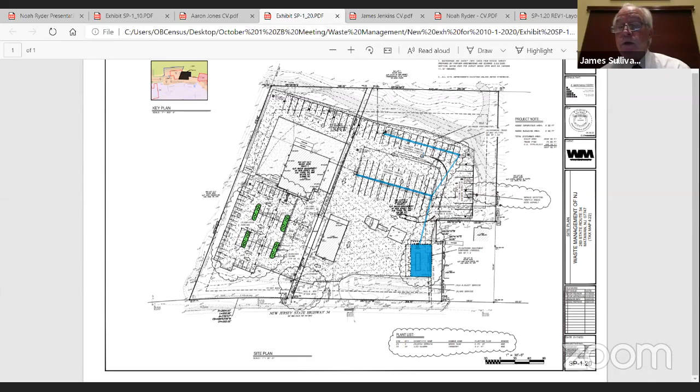Okay. Mr. Sachs, you have anything? No, I don't, Mr. Chairman. Mr. Garrity, Fire Marshal Garrity, I'm sorry. Yes, I do. Mr. Mitchell, one question.

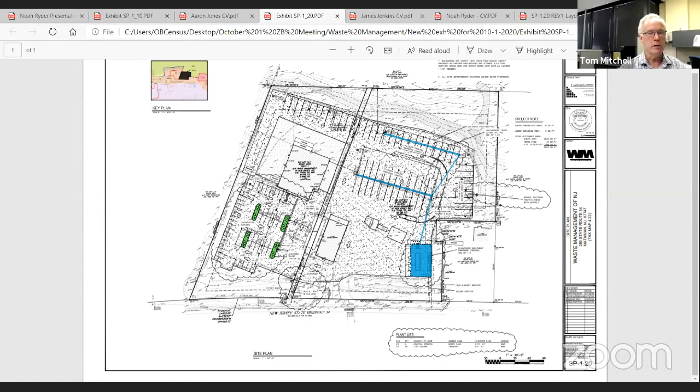The fuel package on the Diesel Island now, what is the intention? Will that stay until your new process is in place? Will that be removed as you are going to be paving the area? It would be a smart time to remove the underground tank from there. Yeah, there is an intent to eventually phase that out and remove it completely. The timing for that is a little bit up in the air because of everything that we've all been experiencing this past year. Financially, budget-wise, it's difficult to project when that will actually be removed, but that is the intent.

And also, Tom, I think it's the case that the proposal to get the new CNG vehicles, it's not going to be all at once. It would be a phased transition, and that's another reason we would keep that on site, or at least that's my recollection of our testimony from the previous meeting - we intend to eventually phase it out, but that would be a subsequent demolition decommission permit. Okay, thank you very much.

Board members, I'll go Ms. Chevalier. No questions. Okay, Ms. Kilduff. No questions. Mr. Dewhurst, a question for Mr. Garrity?

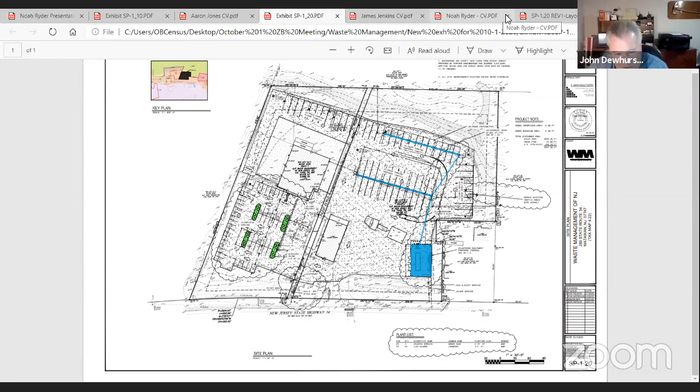Okay, Tom, the fire hydrant moved on the inside. Is that the only hydrant that's there now? That is the only hydrant that is on site. There's a hydrant directly on Route 34 on the other side of the gate. And the reason that was put in there is to get the engines and whatever equipment onto the property and off Route 34.

Okay, thank you, Tom. Mr. Connor? No question. Okay, back to you, Mr. Sardo. I believe I caught everyone there. Thank you. The next witness I'd like to call is Noah Ryder.

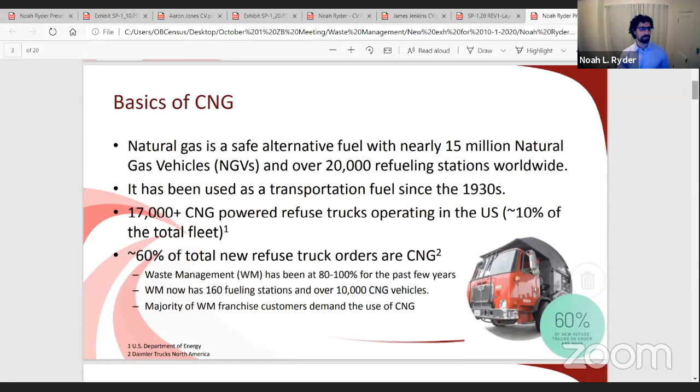So when we talk about CNG and its prevalence, one of the important aspects to understand is the safety that is associated with it, and some of the things that make it equivalent or even greater safety than is often associated with diesel or gasoline powered vehicles. So CNG is treated with an odorizer.

Usually it's ethyl mercaptan, can be something else occasionally, but that's the typical one. It's detectable at a very low limit, usually about 10 to 20% of the lower flammability limit, which means you're detecting it about 5 times earlier, or at 1/5 the concentration that would be required for ignition. So you're smelling it well before it becomes a hazard.

In addition, it's much lighter than air, so it rises rapidly and dissipates quickly as well. The hazard is actually moving away from typically occupied areas and where vehicles and personnel might be, which is a good thing in reducing the risk.

In addition to being able to smell it early and its buoyancy properties, it has a pretty narrow range of flammability. This means it has to be in the proper mixture in air in order for it to actually be flammable. If it's less than a 5% concentration or greater than 15%, it won't be able to ignite.

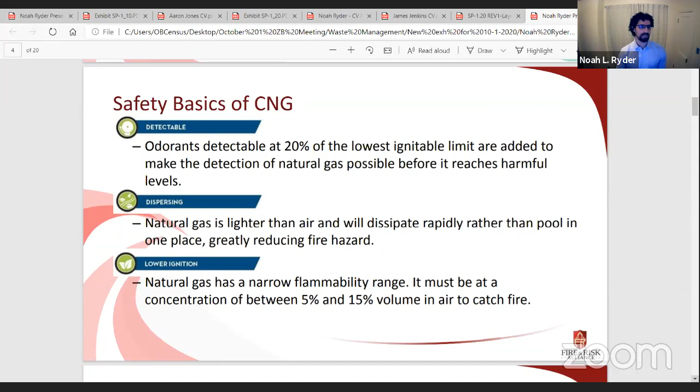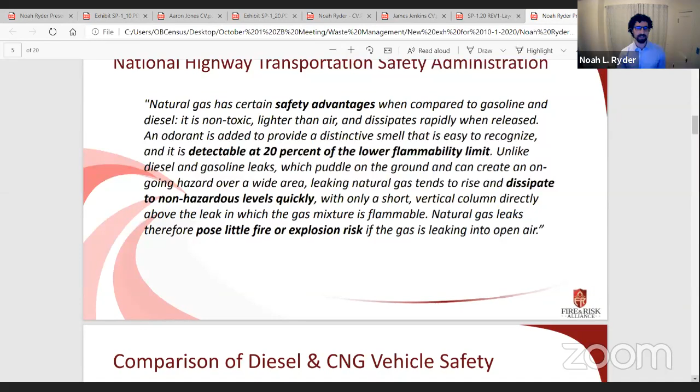So some of these properties have actually been summarized by the National Highway Transportation Safety Administration in a report they've published on natural gas vehicle safety in general. I've kind of highlighted a number of things here in bold. What they say is that natural gas actually has a number of safety advantages over gasoline and diesel vehicles.

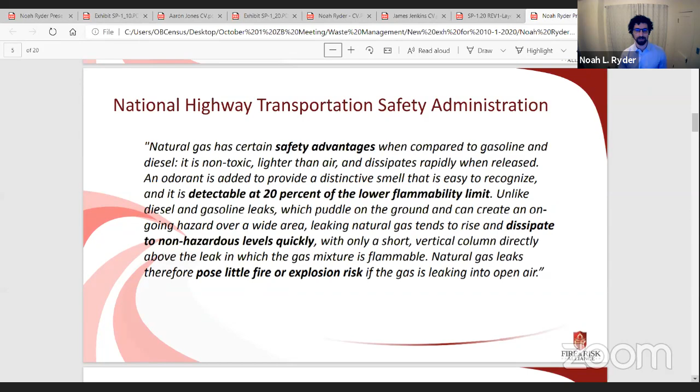It's detectable at 20%, as mentioned before. It's lighter than air, so it dissipates to non-hazardous levels quickly. In conclusion, when released into the open air, it poses little fire and explosion risk. This is based on their own research and statistical analysis, as well as the understanding of the physics of CNG. This is kind of the official position of the Highway Transportation Safety Administration.

Thank you. So one quick thing for a couple slides to compare diesel and CNG vehicle safety, because that's kind of what the transition is moving towards.

In addition, I believe Marty spoke a little bit earlier about the fact that they have never had a cylinder failure. This has also been shown to be a relatively low event broadly across the board, not just with Waste Management, but with all CNG operators - the rupture rate for cylinders is nominally 1 per 56,000 cylinder years.

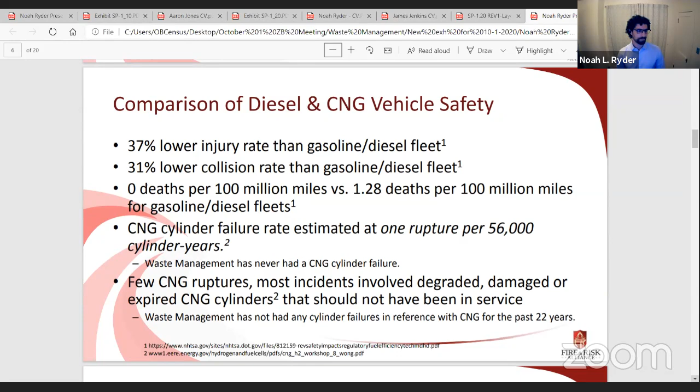In addition to that, oftentimes you may hear or see about fires in refuse vehicles. One thing that is important to note is that fires that occur in the hauling area really occur at the same rate regardless of the type of fuel that's operating or driving the vehicle. So whether it's a diesel or a CNG truck, if a fire catches in the hauling area, it is kind of irrespective of what's going on underneath the hood, so to speak.

Similarly, if there are fires that originate within the cab itself, in the driver area or so forth, most of those components are identical, and so a fire there is nominally the same statistically speaking, regardless of fuel type. So a lot of the events you may see are driven not as a function of fuel, but from other incidents or things that have led to the fire itself.

Just to interject - your understanding of CNG vehicles is that when there is that kind of fire in the hauling area, as you put it, the safety features in the CNG vehicles include heat detection on those cylinders that, in the event it heats up to the point of detecting a fire, vents the CNG right out directly up into the atmosphere to disperse the fuel and get rid of that flammable element.

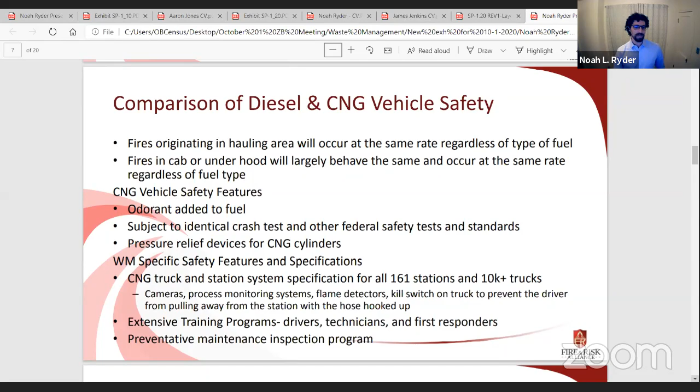I'll take a minute here to go over the next two slides, addressing regulations and codes and standards. I'm not going to spend a lot of time other than to say that as it relates to CNG vehicles and operation, there are quite a number of national and international codes that address all components.

Going from the cylinder itself and how it's pressure rated and constructed, to valves, breakaway devices, the flexible hoses themselves - all of these are required to meet standards developed by well-recognized national or international agencies, such as ANSI or NFPA or others. All of these standards combined are what allow these facilities and vehicles to be produced and operated in a consistent and safe manner.

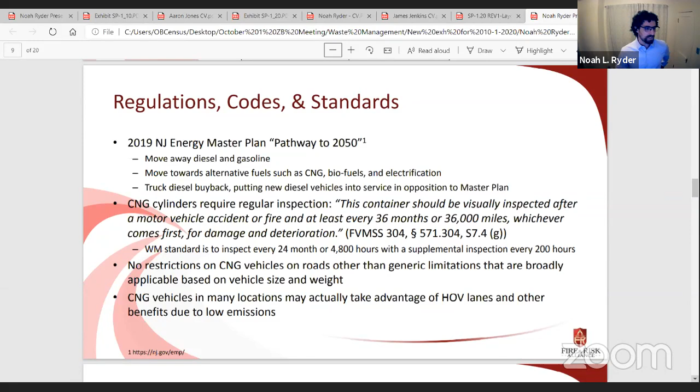So the next three slides are really addressing the site, as was discussed earlier, and its layout, and in particular NFPA 52, which defines some of the required setbacks. I'm not going to spend a lot of time on this, and we'll see these setbacks shown on the site plan and with the electrical area classification on the next two slides. But in short, NFPA states there needs to be basically 10 feet of separation between the point of transfer to other important buildings and highways, and that is met.

There should be 10 feet of separation between a CNG storage container and combustible materials, and based on the site plan as presented now, that is also going to be achieved. There should also be 10 feet of separation from the compression or storage area to a public street or sidewalk, and that is met. So all of the required setbacks in place by NFPA 52 have been met for the present design.

Next slide. As Tom indicated earlier, this is the site plan, the revised site plan, just as a reference. You can see, even though the distances are not clearly delineated for you on screen, all the required setbacks exceed 10 feet in all directions from public ways, combustible materials, and so forth.

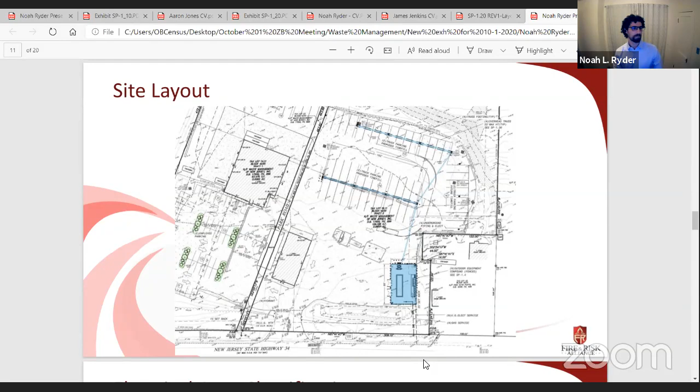We can get into details of that later if need be, but that designation indicates that under normal operations, there's no expectation that there would be any flammable gases present, but because flammable gases are contained there, it is possible that they could be. So out of an abundance of safety, there are additional safety measures put in place on electrical equipment there, with the idea being that if there was a release, nothing in the vicinity would ignite it, and the gas would be able to simply rise out of the hazardous area, reducing the risk of any ignition occurring.

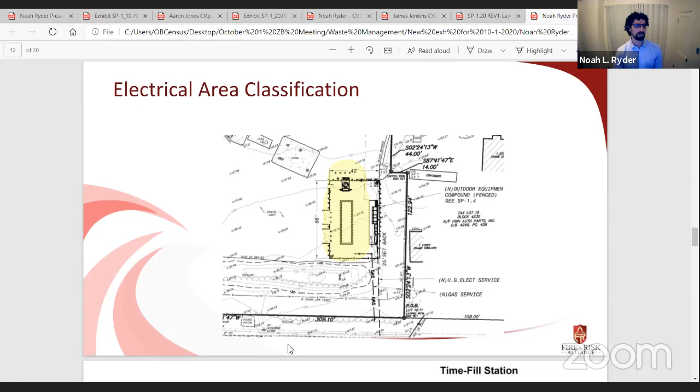As it relates to CNG station safety, the proposed station is primarily going to be a time fill station, meaning it slowly feeds natural gas into the vehicles and automatically stops when they are full. What this means is that the flow rates coming out of the compressor and going through the flex line to the trucks is actually coming at a much reduced rate, so that in the event something happened, the gas would leak out even slower.

On top of the filling process itself, there are numerous safety features and inspections baked into Waste Management's design and approach. This includes daily, biweekly, and monthly inspections of the refueling operations to ensure everything is functioning and operating properly. It has an emergency shutdown system, breakaway devices in the event a truck failed to disconnect, and a process control system that monitors pressure, temperature, as well as the flame and gas detectors I mentioned earlier. All of those are tied into a system ensuring things are operating appropriately.

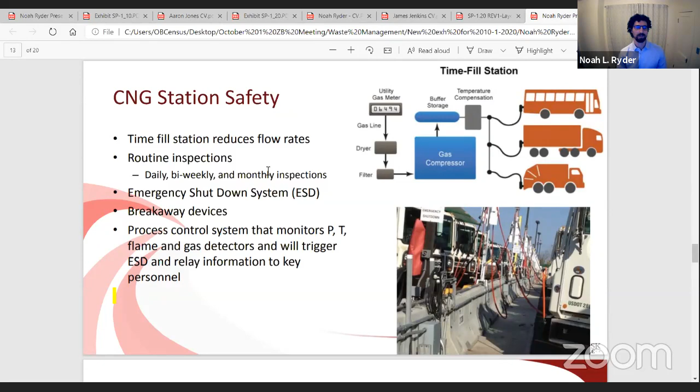As I mentioned earlier, there's quite a number of CNG vehicles and stations operating worldwide. But importantly, just within New Jersey, there are currently 28 fueling stations, including 17 publicly accessible ones for passenger or lightweight vehicles to refuel. So we have average citizens filling up CNG vehicles in addition to fleet use, and then 11 private stations similar to the one Waste Management is proposing here. Some of this infrastructure and fleet turnover to CNG was funded by the New Jersey Clean Cities Coalition, which has put about $50 million into pushing CNG fleets and fueling stations throughout the state.

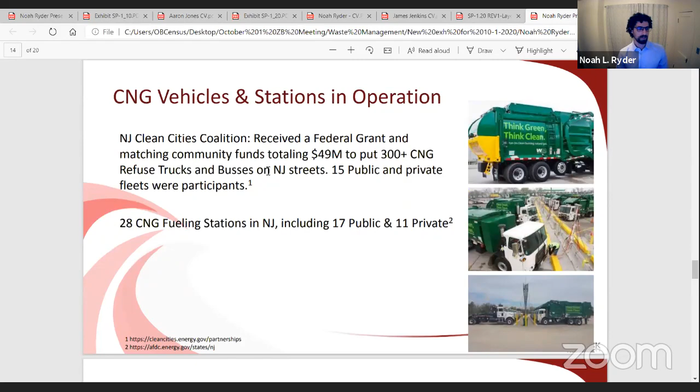Continuing the fleet discussion, Waste Management is by no means unique in this endeavor. Multiple gas companies, including South Jersey, New Jersey Natural Gas, Elizabethtown, and others, all have CNG fleets for many of their company vehicles. A number of other refuse companies, MJF Materials and others, have CNG fleets operating as well. Outside of that, there are large mass transit vehicles that New Jersey Transit and several others operate, so many of the buses you might see are CNG powered and have been operating for over 20 years.

As Marty mentioned earlier, within New Jersey, Waste Management already has over 200 CNG vehicles operating in the state, about 36% of its fleet, and is planning for more. The fleet is currently located in a number of cities, including Camden, Trenton, and Toms River, and obviously this would be an additional location.

One other point I wanted to bring up, not related to refuse, is that in addition to refuse vehicles, there is actually a push to have first responder and emergency services vehicles be CNG operated. A number of years ago, there was a CNG fire truck in the US that made the rounds more as a display vehicle. Within the past 4 or 5 years, the Bossier City Fire Department in Louisiana has purchased and operates numerous CNG EMS and basic fire department vehicles, and has continued to purchase them as new replacement vehicles are required. So CNG is clearly safe enough that emergency service vehicles and departments feel comfortable using it on a routine basis.

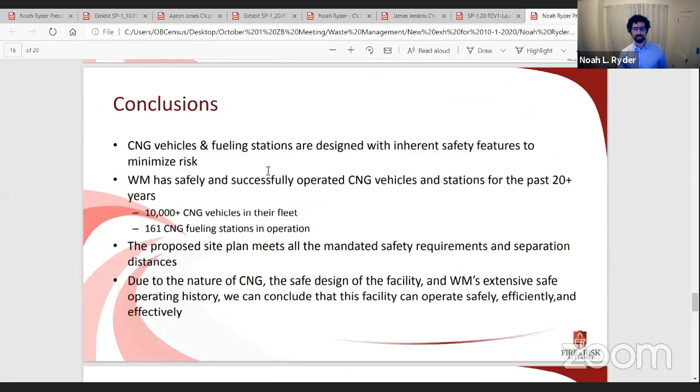So this is the last slide I have, and it really is just my conclusions based on a review of the information out there, the specifics regarding this station itself, and in general Waste Management's operations. In short, both the vehicles and fueling stations are designed right from the ground up, from the codes developed to ensure safety, all the way through manufacturing and the testing, inspection, and maintenance programs put in place to ensure safety throughout the lifespan of the vehicles and stations, to minimize the risk associated with them.

Waste Management has probably the largest CNG refuse fleet by far in the U.S., and has been able to safely operate those 10,000 vehicles in 160 stations for over 20 years in a safe manner, through all the things we've discussed here. But importantly, they're going above and beyond what's required by the standards, including training of the local personnel that may be responding.

From my review of the site and the plans that Tom has presented, it meets all the mandated safety requirements with regards to separation distances. And in conclusion, my stance is that because of the inherent nature of CNG, its physical properties, and the safe design of the facility, this facility can operate in a safe, efficient, and effective manner due to all the steps being taken, both at Waste Management's level and within the CNG industry itself. That's all I have for right now.